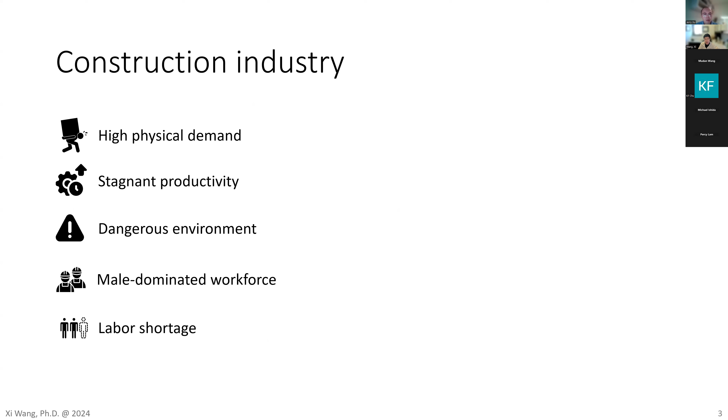So how can we solve this, and what can we do to make it better? A promising solution is robots. Robots have high speed, great physical power, and can accurately repeat the work without getting tired. So they have high potential to mitigate these issues faced by the construction sector.

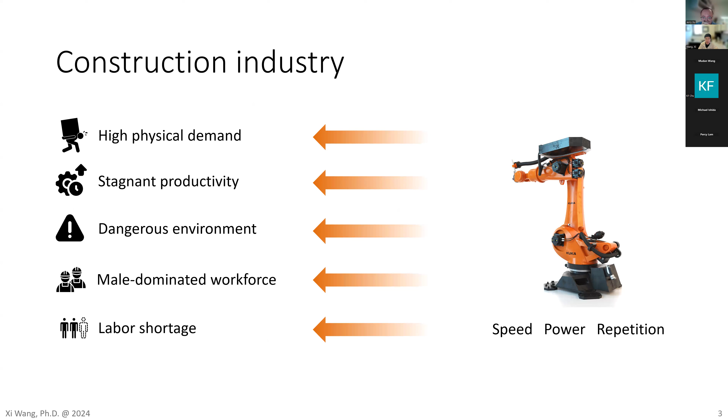However, until nowadays, very few robots can be found on construction sites. To understand the reason, we can take a look at human and robot capabilities.

Humans are creative and can adapt and adjust based on instantaneous scenarios. They are good at perceptual understanding and learning from past experience. For robots, it's difficult to produce truly innovative ideas or concepts, and it is challenging for them to adjust to new scenarios that fall outside their predefined operational protocols or training data. In this case, human improvisation and intervention are often required to cope with such changes. Robots also have low synthesizing ability to combine various sources of information, and they often lack the instinctive understanding, or gut feeling, that humans often rely on for decision making.

On the other hand, robots have high physical capability, and they can detect minor deviations in the physical world and perform fast numerical computation, with high speed and accuracy. Compared to these robot capabilities, human physical capability is relatively low. We cannot detect minor deviations, like a few millimeter or centimeter deviations in the physical world, by our eyes. Our performance is often inconsistent and subject to errors.

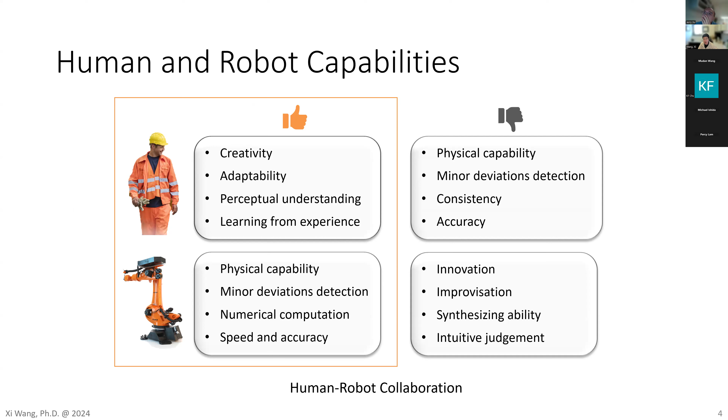So from this, we can see that some human capabilities are indispensable for construction work and are hard for robots to possess within a short period of time. So human-robot collaboration that takes advantage of both human and robot capabilities is emerging as a promising approach in the area of construction robots.

For any human-robot collaboration task, we can consider it from a vector of three capabilities: planning, the high-level operational planning capability; cognitive, the low-level execution planning like trajectory or motion planning; and physical task performing. For most current human-robot collaboration tasks, the robot performs the physical work and the human performs most of the planning and cognitive work.

It can greatly reduce the physical stress of construction workers by relieving them from strenuous physical construction activities. But robot capability is limited to physical work that cannot or is difficult to be pre-programmed or fully autonomously performed by the robot because of the complexity of construction.

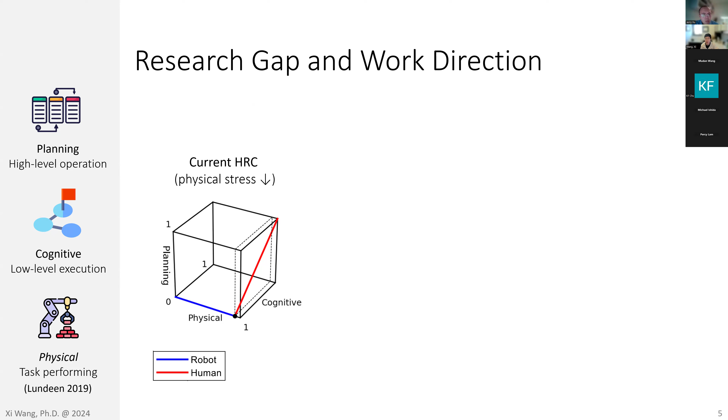So we propose that human-robot collaboration should make better use of robot intelligence by letting robots perform some of the planning and cognitive work. In this case, both the physical stress and mental effort of construction workers can be reduced, and the overall productivity and safety of the human-robot work team can be improved.

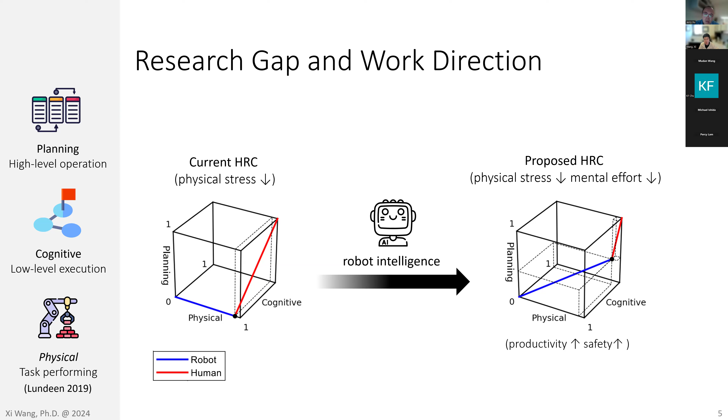With this vision, the overarching goal of my research is to create a system to enable smooth human-robot collaborative construction, and I worked towards this through three steps.

First, I developed a collaboration platform that allows humans to remotely collaborate with robots from a safe work environment. Next, I integrated building information modeling as an additional database to improve the accuracy and autonomy of the system. Finally, I explored how to let the robot learn motion sequencing skills from humans to further reduce human planning effort. For time reasons, I will focus on the first two objectives.

The first objective is to establish a collaboration platform that allows humans from a safe workplace to remotely collaborate with on-site robots, with humans performing high-level planning and supervision work like a supervisor, and the robot performing sensing, cognitive work, and execution of the work as an intelligent assistant of humans on the construction site.

So what technology can help us establish this collaboration platform? The first thing that came into my mind is digital twin.

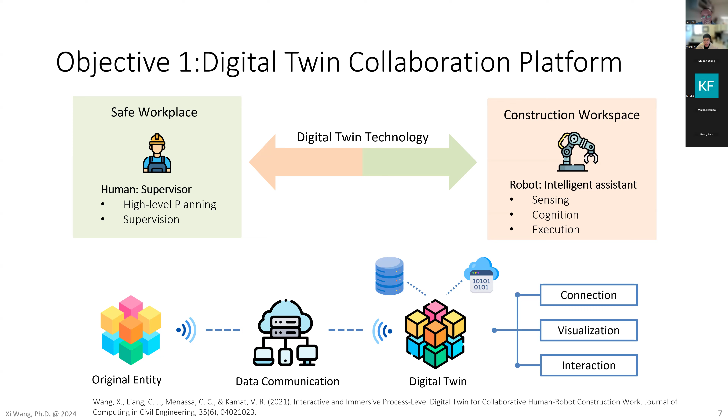With this vision, I proposed an immersive and interactive process-level digital twin system. The system contains three modules.

On the human side, we have an immersive VR interface that creates an augmented telepresence experience for the human workers and allows them to support their planning, instruction, and supervision.

On the robot side, we also have the robot operational environment that includes the construction site, the robot on site, and the sensors either on site or on the robot. It can perceive the construction site environment, detect robot states, and is also where construction tasks are actually executed.

To connect the human, the robot, and the construction site, we introduced the robot operating system as the middleware. So ROS can not only wirelessly communicate with both the VR interface and the robot by sending and receiving different messages, but it can also perform computation work like sensor fusion, motion planning, and robot control.

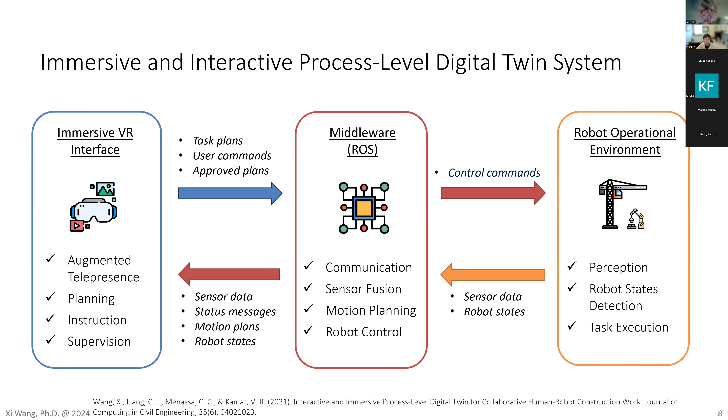As the next step, for our next objective, I integrate building information model into the previous system. Building information model is a technology widely used in construction that contains not only the 3D geometry of the building, but also the information of each component in the building.

By integrating BIM into the system, it can provide data to both humans and robots to drive the construction process and make it more accurate and automated. Also, the as-built information collected by the robot can be sent back and recorded in the BIM for future use, closing the loop.

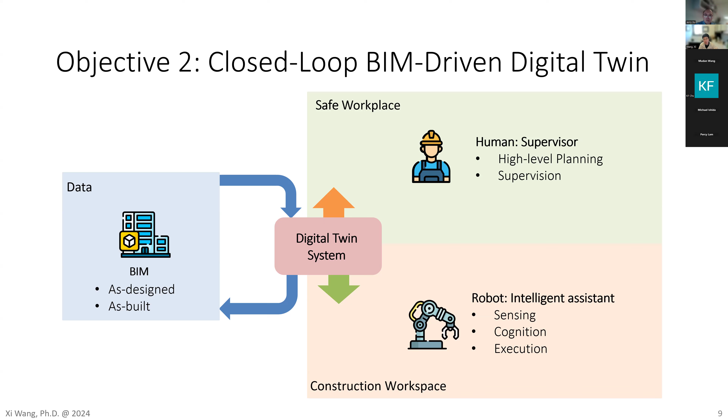So I propose a four-step BIM-driven construction process. The first step is to create a BIM that can be used both by the human and the robot. Then we need to do some preparation on site. Then comes the construction process. And finally, after the construction, the as-built data will be updated in the BIM.

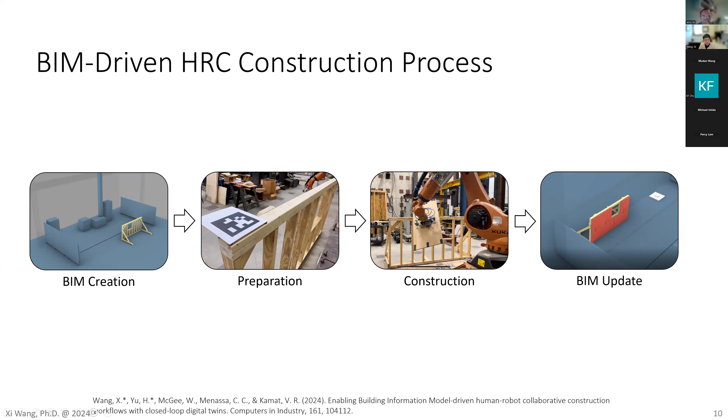I will then delve deeper into each of these steps. The first step is BIM creation. BIM is playing an increasingly important role in the industry, all the way from the design phase to the operation and maintenance phase of the building.

However, it is not originally designed to support robotic construction. So here the question is, what should BIM be like? What information does BIM need to contain for robotic construction? And how can we take advantage of the existing platform to enable this connection?

First, BIM needs to have the shop drawing geometry, so that instead of an entire wall surface, the robot needs to know where each panel goes.

And the second is, since in construction we have loose tolerance, we design the frame to be installed at this place, but on the construction side we may have some uncertainties, some situations where we finally decide to move it a little bit, and this may cause confusion for the robot. So this object relationship can help solve this issue. In this case, the frame is a parent of those panels. So if the frame is deviated, the robot knows that the panel should go with the frame and it needs to adjust the installation of the panels according to the frame location.

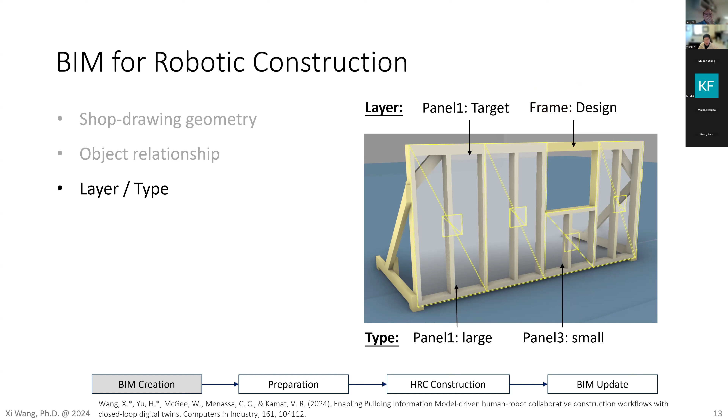And a clearly defined layer and type can make it easier for robot planning and control. The BIM can also contain the sequence data to automate the construction process. And lastly, especially for some construction materials with irregular shape, we need to tell the robot how it should grab the object, like give it the position and orientation to grab the object.

So in this study, although I manually input much of this information, several pieces of this information have high potential or have already been able to be automatically generated. For example, we can transfer the BIM component into shop drawing geometry, we can automatically figure out the sequence to install objects, or we can let the robot automatically decide how it should grab the object.

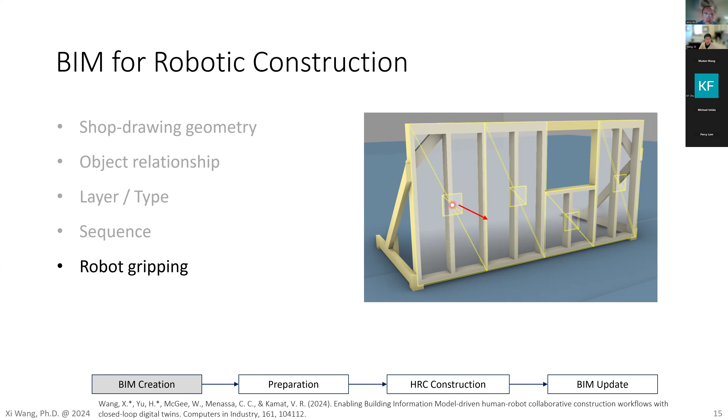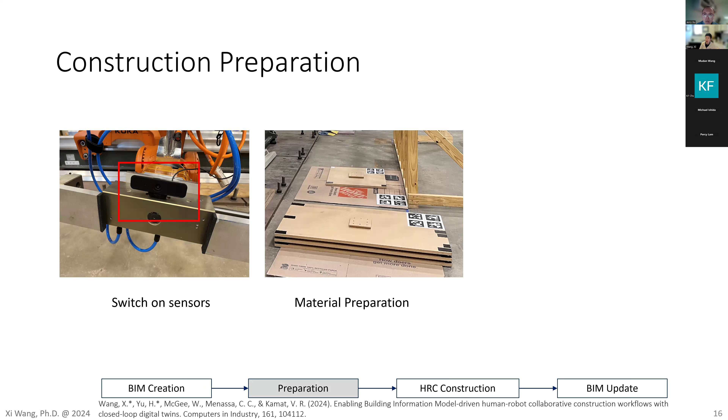After we create the BIM, we come to the next step to do some preparation work for construction. This includes switching on the sensors on the robots, preparing the materials and placing them into the robot workspace, and lastly, assigning tasks to the robot in the BIM. Compared to the robot, the BIM has a relatively user-friendly interface. So the workers can just select a few objects in the BIM and place them onto the target layer. In this way, the worker is telling the robot, I want you to install these few work pieces or objects during this task.

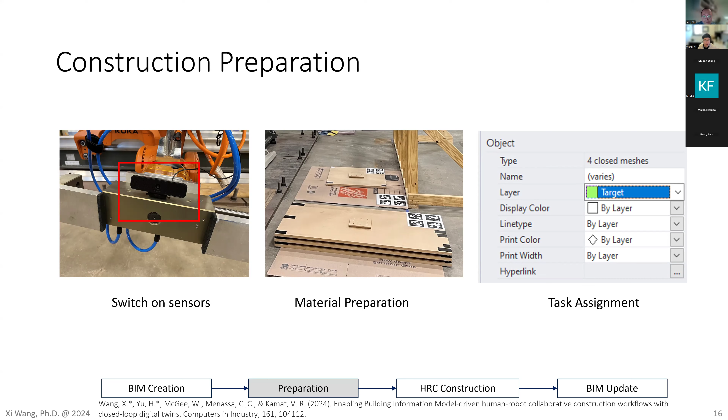So after preparation, we can start the construction. To begin the construction, the digital twin needs to be generated. Here I propose an automated approach to generate the digital twin. The BIM is saved in Rhino, and then we created the connection interface in Grasshopper to retrieve the information from the BIM and publish it to other modules in the system.

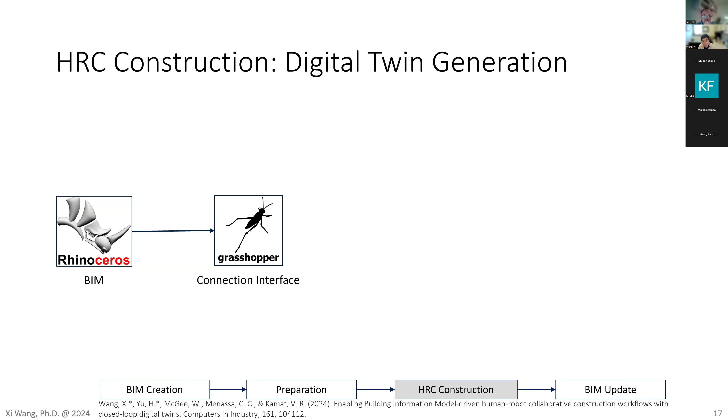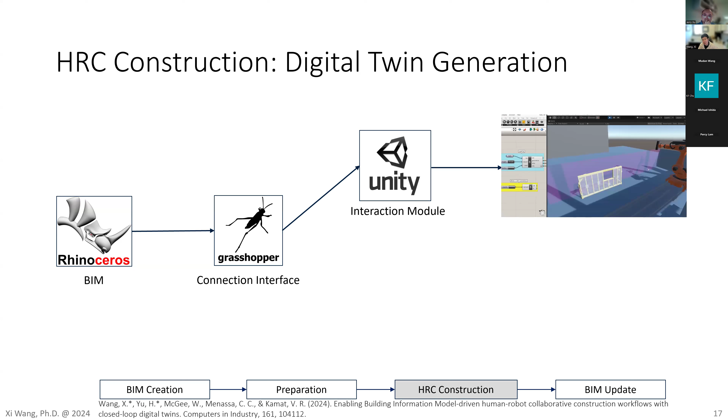There are actually two digital twins of the BIM in the system. The first one is in the interaction module in Unity. You can see that through one click on the button in Grasshopper, the digital twin interface is generated in Unity, and it is interactive and ready to use. We use some templates to attach the interactive functions to these objects. The second digital twin is the computation module in Robot Operating System. It is used for the robot to do some planning work like collision detection during motion planning.

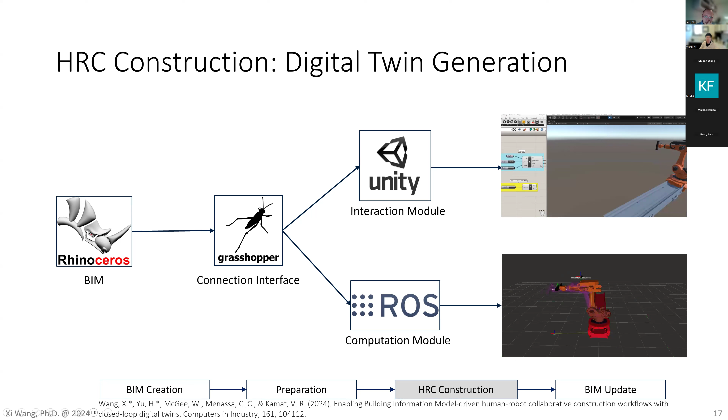After the BIM is generated, another issue we need to consider for construction, as I mentioned before, is the potential deviations, and that happens a lot on construction sites. We consider two situations here. The first is the parent of the object I want to install is deviated. The second situation is a nearby object is deviated. So we propose two solutions for this. One option is that the robot can automatically suggest new installation poses for a human to check and approve. Or the human may choose to directly replace the material with a different shape or smaller size to fit the deviation.

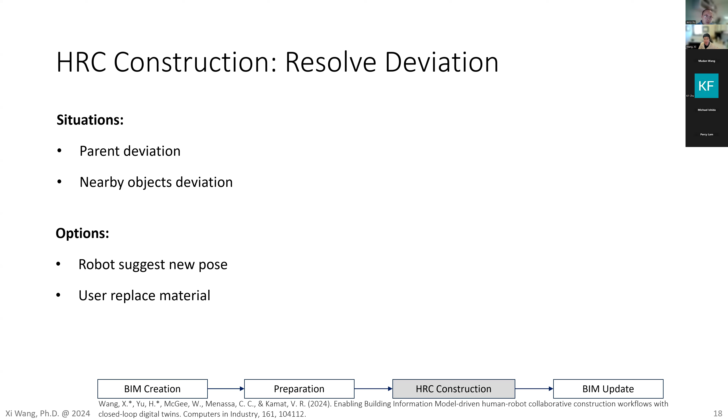For example, for the parent deviation here, the robot can use the as-built transformation it detected from its sensors and the as-designed transformation it extracted from the BIM to calculate the design-built deviation, that is, how the built geometry deviates from the design. Then, based on this transformation, it can suggest new installation poses to install the construction material. And it can visualize the suggestion in the interface to let the humans approve it or make manual adjustments to the suggestion.

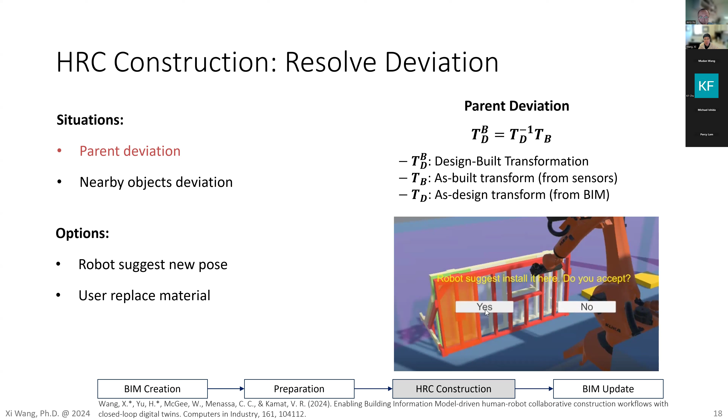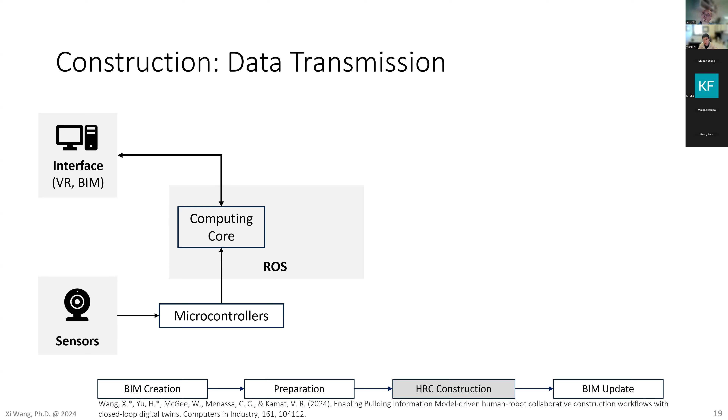And the last part is about the data transmission for the physical robot system. So we have the BIM and VR interface, usually on the Windows platform on the PC, and we have some sensors connected to microcontrollers. So both of them can communicate with the computing core in the Robot Operating System. And when the computing core decides to control the robot, it will send the joint states through the ADS bridge to the robot embedded PC. And then the joint states will be sent to the robot to control the robot movement.

This is because construction robots very often have very high payload and strong physical capability. So sometimes we feel uncomfortable that we don't know what the robot is going to do and directly let it execute the task. So with this, we kind of get an idea what the robot wants to do. And after we approve it, the robot will follow exactly the same plan to execute the task.

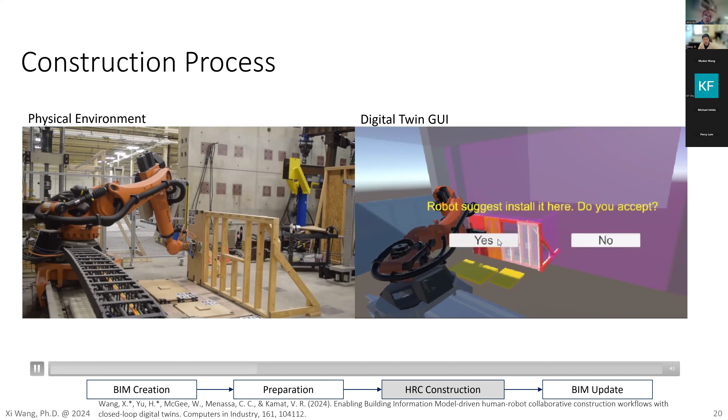So in that way, if you don't know what the robot is going to do, the human workers can be stressed working with a huge robot. And in this way, we have a better check of the robot. And after one workpiece is installed, the robot will check for the next workpiece in the system and follow the process of making suggestions and generating the motion plan.

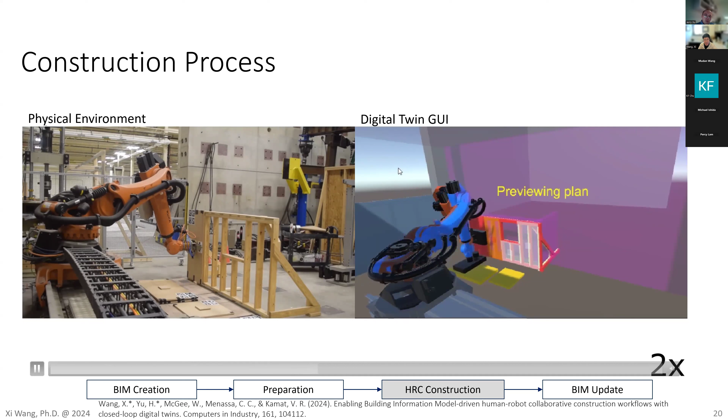So you can see that sometimes the robot has a lot of rotations, and in that case, we want the robot to generate another plan. So we avoid the process of rotating this heavy wall panel several times. So in this case, this plan is much better, so the robot can execute it.

And after the tasks are finished or reach some checkpoint, we can then further update the BIM with the information we collected. So in this case, we have the workspace sensing data, that is the actual location of the frame. We have the robotic construction data, that is where they installed the panel. And lastly, the material data, that is what materials, how many of them, and where they are left on the construction site, can also be updated in BIM.

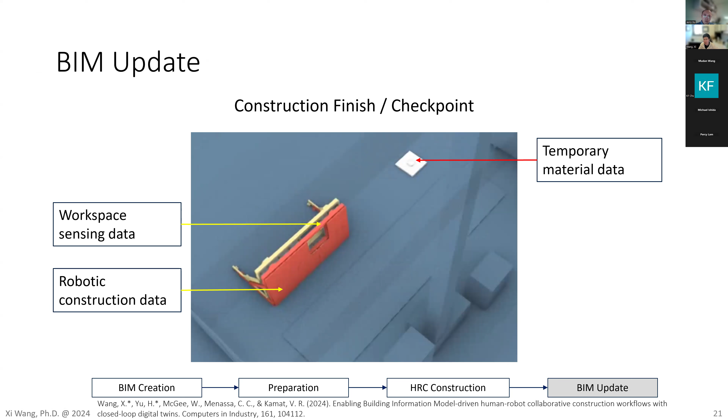So to conclude, this study proposed a human-robot-building connected framework for collaborative construction. For the first objective, we developed a digital twin interface with inspection, planning, supervision, and execution functions to reduce human physical and cognitive effort. And for the second objective, we further improved the accuracy of human-robot collaborative construction and reduced human planning effort by integrating the building information model into the framework. And we also explored the system setup for the physical construction work.

And most importantly, this is an evolving framework that supports future research opportunities, with the flexibility that other researchers or professionals can replace modules like the object detection or the robot motion planning modules in this framework and connect them with other modules to explore the whole construction process with the improved algorithms they propose.